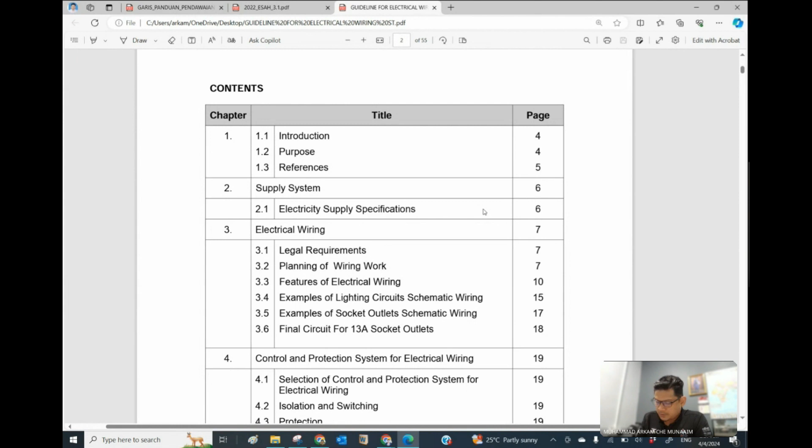The table of contents of this document, we're going to read what it is about, 55 pages, very short, but the narrative needs to be gone through one by one. There's introduction, purpose, references, and from here we will see the documentation used to develop this guideline.

As I mentioned, our work as electrical engineers, and actually all engineers, depends a lot on compliance with standards, guidelines, handbooks, codes of practice, and so on. Based on that, the reference is also very important and will be discussed in this document.

We have also to introduce our supply system, even though we talked about it last week on electrical supply specification, because we need to specify our supply characteristics to suit our equipment needs, talking about voltage level, frequency, and those things.

Then we'll talk about electrical wiring compliance to the legal requirement. Why is it very important? We need to plan our wiring work and the features of electrical wiring, what features we have in electrical wiring.

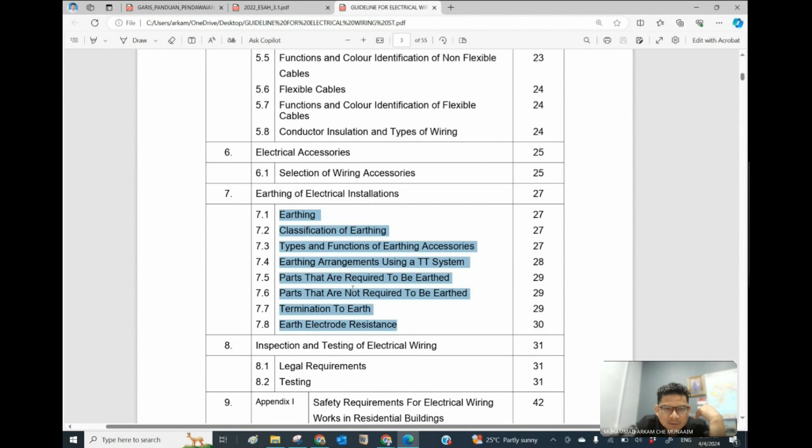Is there lightning protection here? Oh, there is no lightning protection in this document, but it's okay. Let's go back to the document to talk about lightning protection first, then we can come back to this document since there is no lightning protection here.

Earthing only, and inspection. This is very important to explain what kind of inspection we have in our system, and some of it relates to body safety and forms, the related forms. So the lacking part here is actually the lightning protection, but we know why, because this is residential buildings.

For residential buildings, lightning protection is minimal. So let's have a look into lightning protection first from the last lecture, then come back to continue this guideline. This is different, because we ended at part 10 of the document.

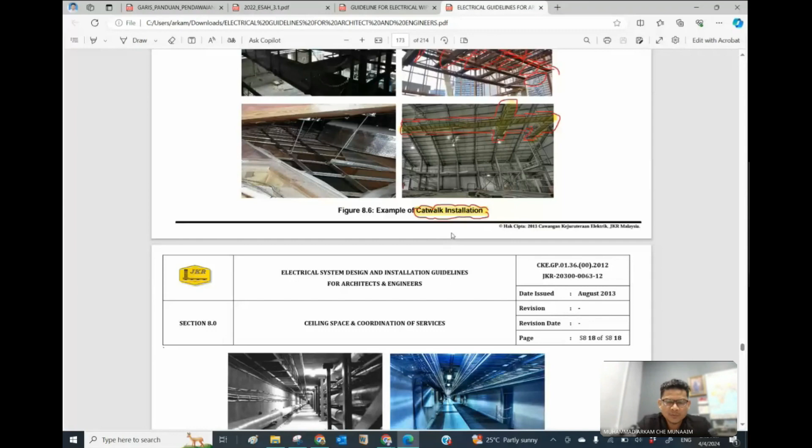We want to talk about cable trenches, which we've covered, and now we're going to talk about lightning protection systems for structures as an addition from our past lecture. This is also important, because in this document we don't have lightning protection since it's residential only. Lightning protection for non-residential buildings is more appropriate to discuss.

All right, okay, as an introduction, let us deselect this, because this is also quite important.

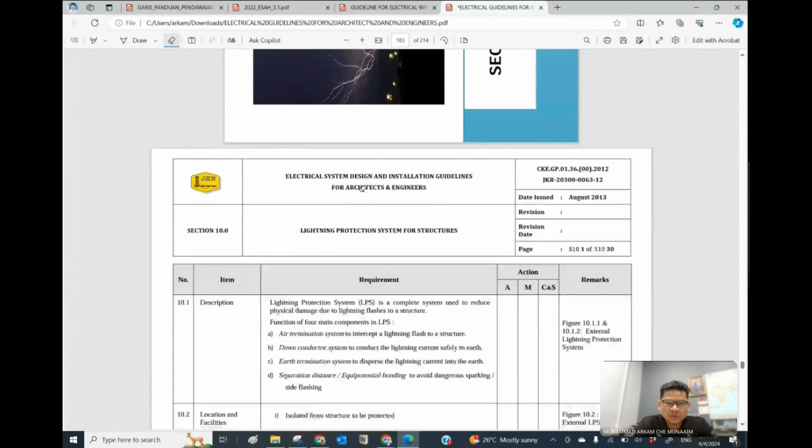In our lightning protection system, we have three main parts. The first part is the air terminal. Secondly, the down conductor. The third one is the earth termination system. So these are the three main parts in lightning protection. I'll try to draw it later, but initially, let's try to find some way.

Okay, this one is okay. Just enough for us to understand.

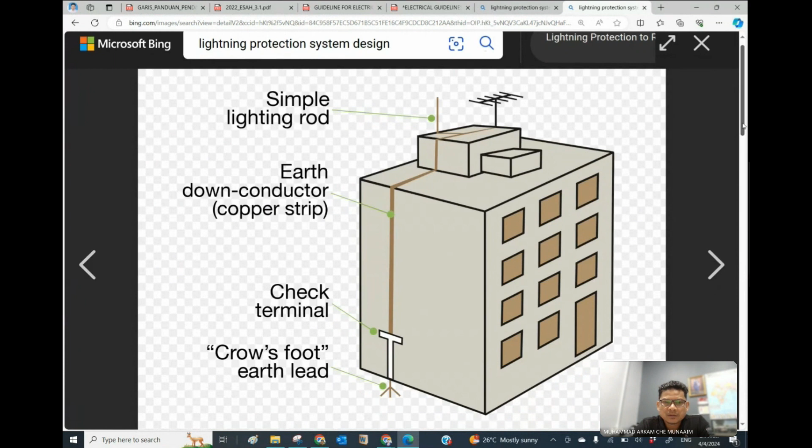Lightning protection comprises of three main parts. The first one, let me draw this. Lightning rod, or air termination. This is the first part.

The second part, as mentioned in the document, is the down conductor, indicated here.

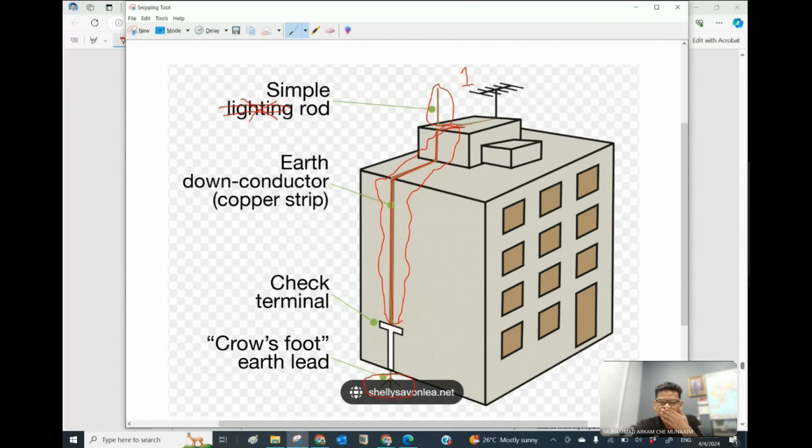This document shows the earth termination system indicated here, where in the drawing they will show like this. This is from the down conductor, this is the lightning rod. One, second, and also third. So this is second, this one is the third one.

So these are the three main parts we're talking about in lightning protection. We've got three main components or three main parts. Very important to understand this first.

But in order to connect this between the down pipe, down conductor, and earth terminal, the earth terminal... this is down conductor, let's use a pen. Lightning, this one is down conductor. This one is earth terminal.

So lightning rod or air terminal can also be used. So these three components: air terminal, down conductor, earth terminal. These three main parts as mentioned in this document.

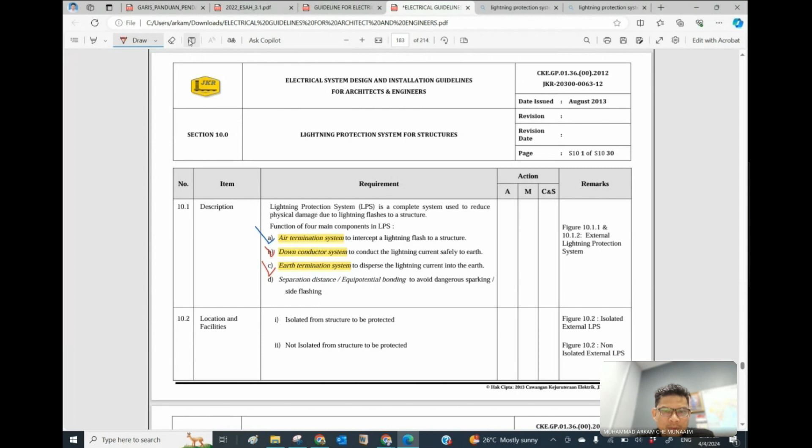One more thing is also mentioned, but we seldom take it as our component, which is separation distance or equipotential bonding. We don't talk about it as a component. It's actually the method, not a component. It's a method of bonding or separation distance.

Okay, so they got a figure over here, but it doesn't matter, we will go to it later. Now, isolated from structure to be protected, location and facilities not isolated from structure to be protected.

Make sure we spell it correctly, because it's lightning, not lighting. So in the document, this one, the spelling is wrong, 'lighting rod' - it's not lighting, it's lightning, but it's okay. It's just a Google search to find the image only, but the spelling is wrong.

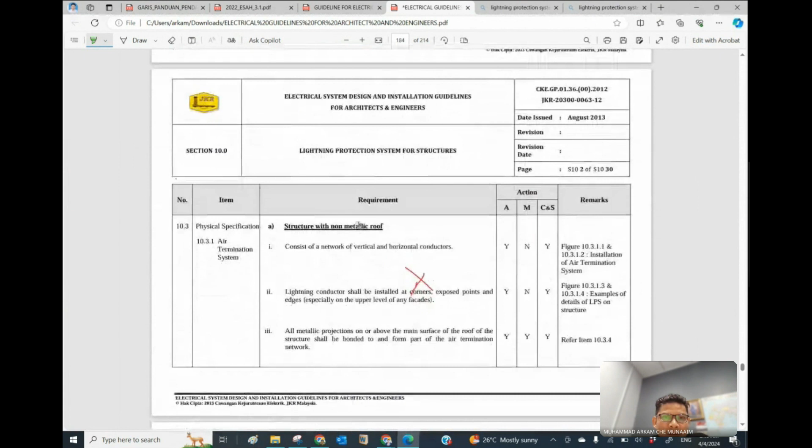Okay, location of facilities, and the third one - what do they say? The purpose of lightning protection is to reduce physical damage due to lightning flashes to a structure. But I will say that actually it's only three, not four - don't add one more, it will confuse the practitioner, because separation distance is not a component, it's actually the method of installation.

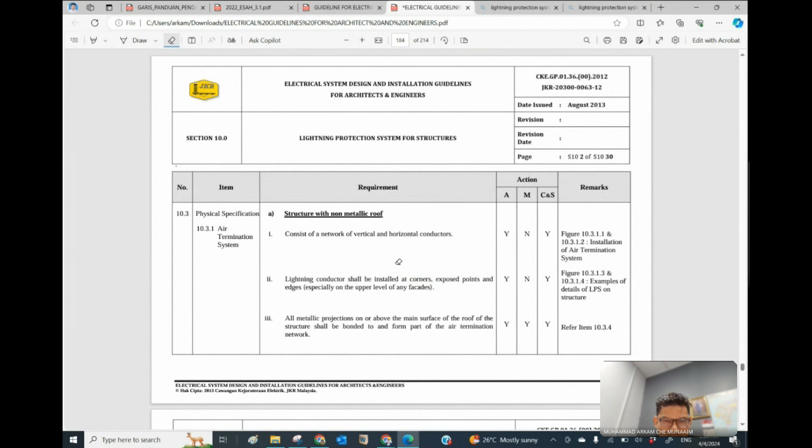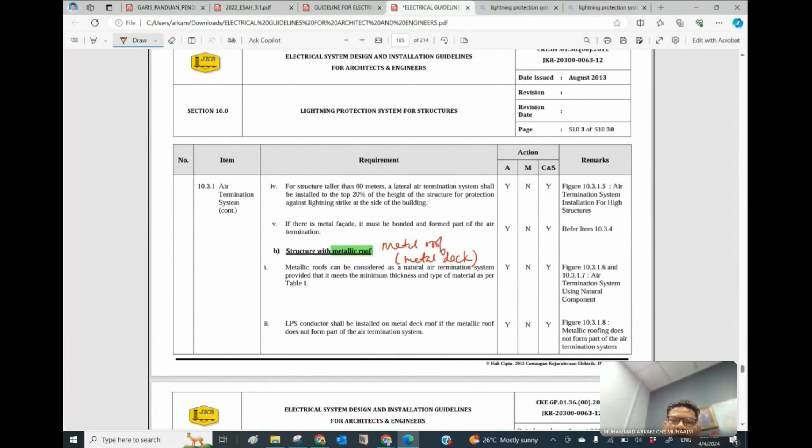Okay, now structure with non-metallic roof. What do we talk about here? There's non-metallic and also metallic roof - there is a difference between them. What does this mean? A metallic roof meaning simply a metal roof, metal deck. So there's a different method of installation.

Non-metallic, for example, what is a non-metallic roof? Flat roof, concrete - concrete flat roof. We also have our genting, tile, including concrete roof tiles. So metallic is a metal decking roof.

So how do we find this metal decking roof? Simple - we have a lot in our PPCAS, FKTA. This is metal decking roof. We have a lot in our big FKTA office. Metal deck and non-metallic roof.

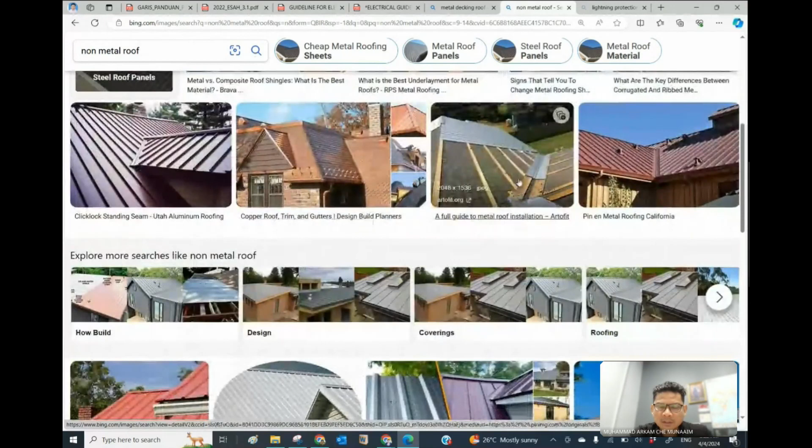Other than that, this is metal roof, this is non-metal - this is what we call clay finish. This is also clay finish. This one is metal, this is also metal, this is also all metal. So we have two different approaches to install our lightning protection, depending on the type of roofing.

So meaning this roofing is considered as a concrete flat roof. While having this concrete flat roof, the installation is different. If we have a metallic roof, the installation is different. That is the meaning by this statement. I don't want to read everything, but there is the statement of non-metal and also metal roof.

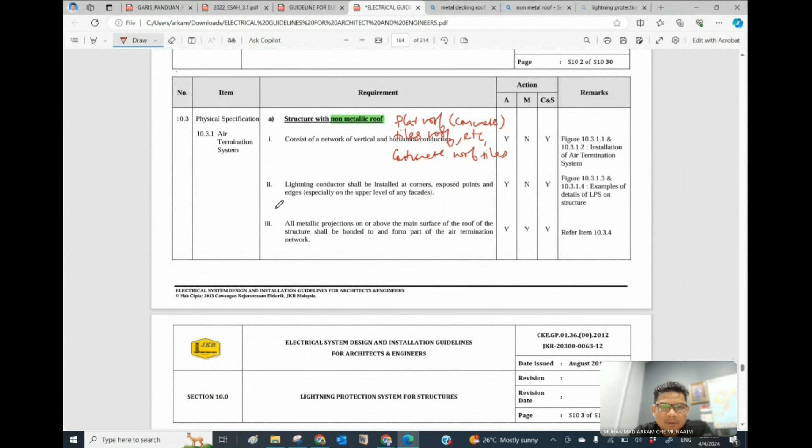Okay, this is how it goes, but we're going to go for the drawing, it's more clear for us to refer to. For structure taller than 60 meters, a lateral air termination system shall be installed at the top 20% of the height of the structure for protection against lightning strike at the side of the building.

So what does it mean? A structure taller than 60 meters, this kind of building, for example, and it is more than 60 meters.

So 20% of it needs to be covered by lateral. And we got one more terminal. This is also lateral.

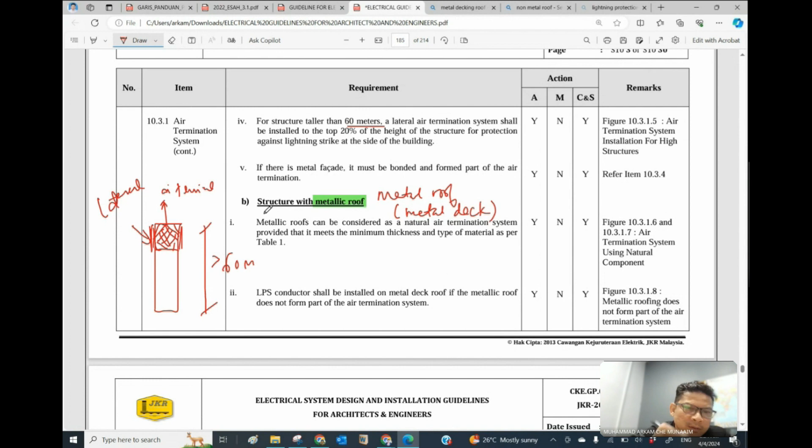This is what I mean by this statement. If there is metal facade, it must be bonded and form part of the air termination. So this is air terminal, and part of it will need to be bonded together, just like you need an enclosure of the patented system.

I've seen one of the recent buildings using that method. TRX is using that method. Is it TRX?

Yeah, this one, new building in KL just completed last year. If you're from KL you will see this building, somewhere in Sungai Besi there. Not this one, this one is under construction. For the top one, they'll change the facade into this look.

Is there any more features that we can see, here it's more clear. This is a new building in KL, beside one more new building, becoming another attraction of buildings, skyscrapers in KL.

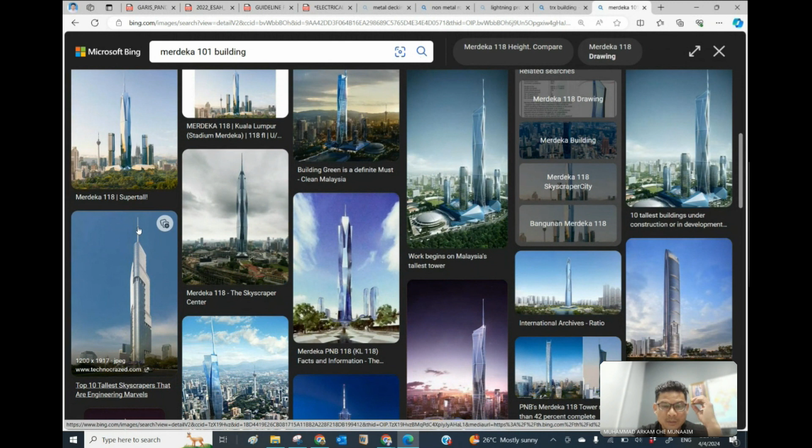Oh okay, no no no, that's here, this one, this building, and we got one more. This building, also in Kuala Lumpur, very nice new buildings. You can see this is not, of course, the lightning protection, but part of it is actually for lightning protection purposes. This one, and this is actually meant for the telecommunication.

This building is in Kuala Lumpur also. So we got two new completed buildings in KL. This is one of it. Sorry, not this one. This one, Merdeka Tower, Merdeka Tower building. My connection is not good, let's try to find it on Google. Just through Google, yeah, much better.

So we got this aerial or antenna of the building, this one. It's now become, I think, the highest building in the world or in Malaysia, I'm not sure. But due to this, the telecommunication antenna over here is very iconic.

And we got one more, TRX, also just completed last year. This one, as mentioned just now, close to Sungai Besi there. And the Merdeka Tower is actually close to our Merdeka Stadium, the old Merdeka Stadium. So this is part of what has been constructed, and we can see the concept is there.

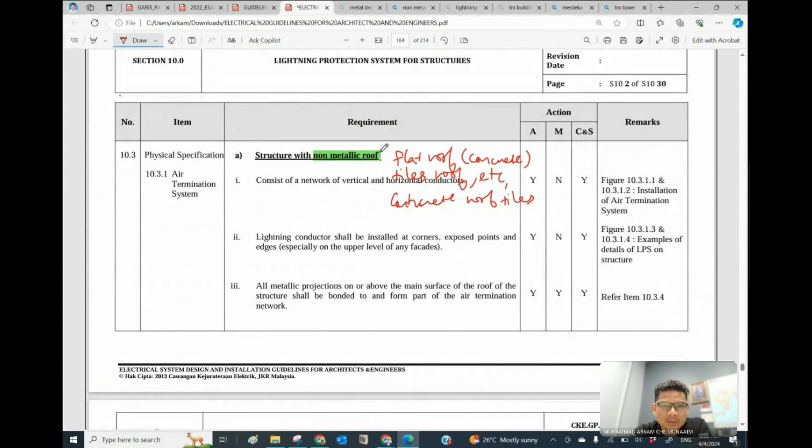LPS conductor, what is LPS? Lightning protection system shall be installed on metal deck roof. Okay, now talking about metallic roof. So for non-metal roof, we will go through the drawing or picture later. And also for this one, it's metallic roof. So how to install? On metal deck roof, which is a metallic roof.

It does not form a part of the air termination system. It shall be installed on metal deck roof. If the metal roof does not form the air termination system, we'll see later. Down conductor - okay, now we talk about air termination.

This is talking about down conductor. A down conductor should be installed at each exposed corner of the structure. This is what I can say is the spec, but it's not necessarily so, because it depends on the design. Down conductors should be installed straight and vertical such that they provide the shortest and most direct path to Earth.

Okay, how to understand the down conductor? Let's see some pictures. Down conductor. Okay, this is all the down conductors. This one still coming, down conductor. Oh, this is a Faraday cage.

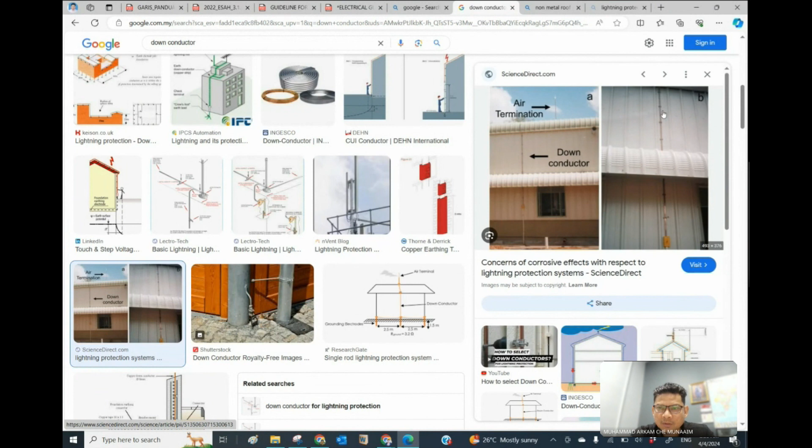Such as this one - this is a down conductor, and this is the air terminal. See, this is a metal wall, but they still install the down conductor there. To me it's not supposed to be this way, but it's okay, should be no problem since they got it in the design.

And where else? See this one also, the down conductor. They're using this copper tape to lay the down conductor.

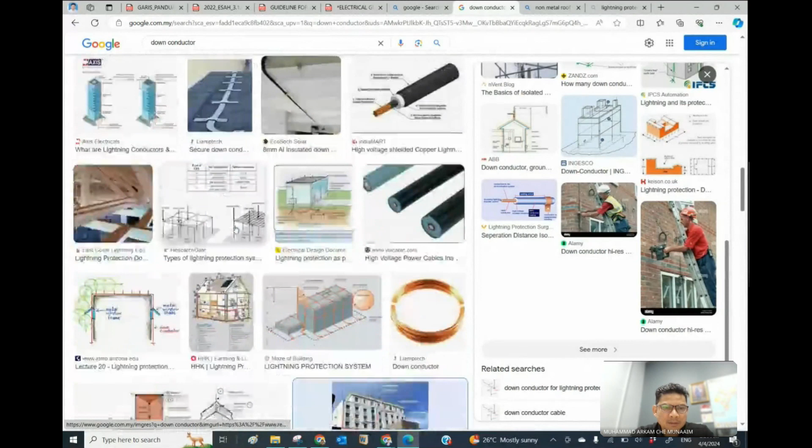What else? To lay the down conductor. Okay, that is actually mentioned by the drawing here. So the down conductor, the air termination or down conductor, that will be the second part.

The down conductor should not be installed in the gutters or down spouts, even if they are covered with insulation. Don't install down conductor in the gutters or down spouts. What is down spout? Rainwater down pipe. Don't install it there, even if it's covered by insulating material.

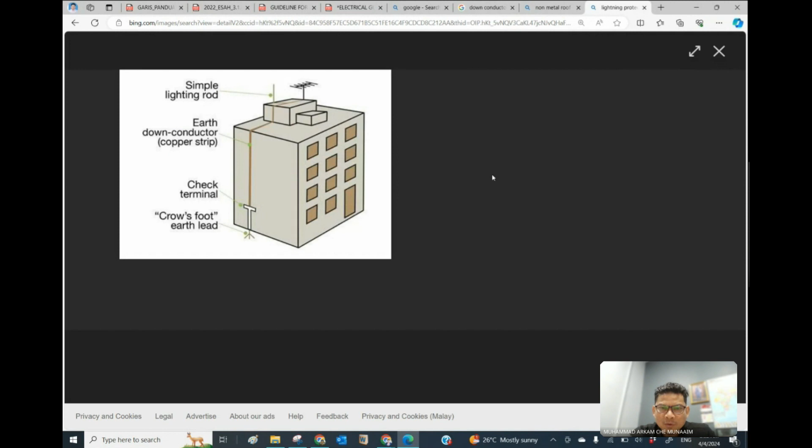Method, how to install? We've got 2 or 3 methods now. I mentioned about 3 methods. The first method, exposed. Expose it, fix to the wall. You can pin it and test point later. Test point we will talk about later. So, for example, this one, exposed.

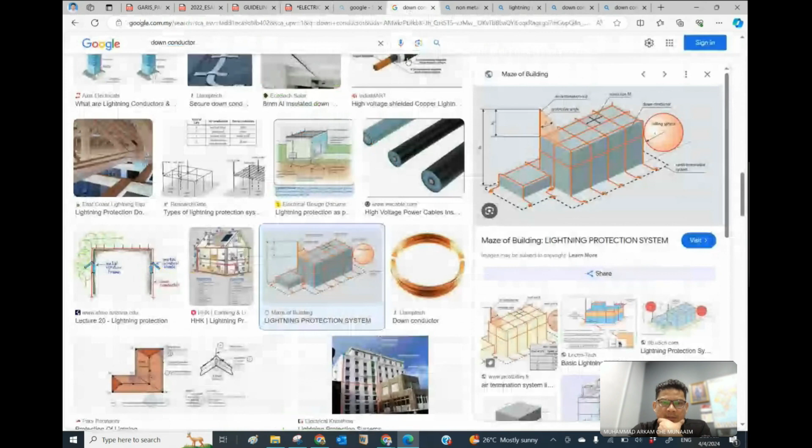Exposed down conductor. We can see also in the last picture. The installation, see, exposed down conductor. And we can also put it into paint if you want to paint it, or you can also cast it in concrete, meaning to say that you put it in a wall to avoid vandalism, because these things, sorry, this thing is quite expensive.

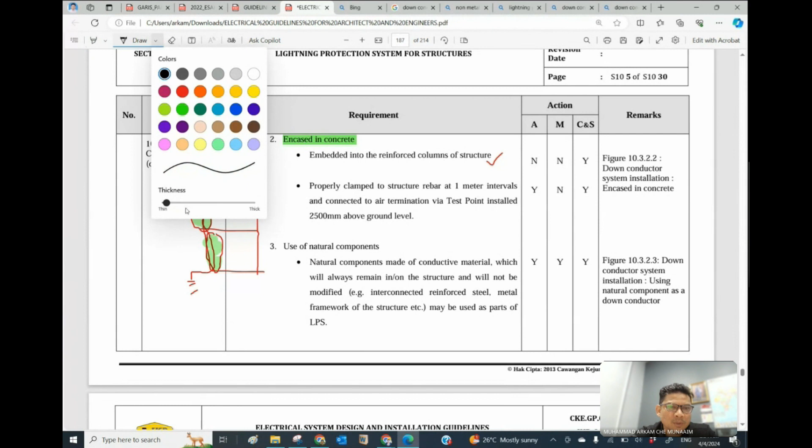If you've got a two-story building, for example, this is the air terminal, this is a down conductor. We can put it exposed. At one point, they will go into the wall and come back out. So this part will be exposed, this part will be encased. So this is also being practiced, because why? It's very difficult to reach the top if you want to vandalize or steal the copper tape. It's very difficult. So that is why this might be exposed, but this one they will encase in the concrete, so that at the lower level they don't worry about the vandalism or attempt to steal the thing. Okay, properly clamp to the structure rebar at 1 meter intervals.

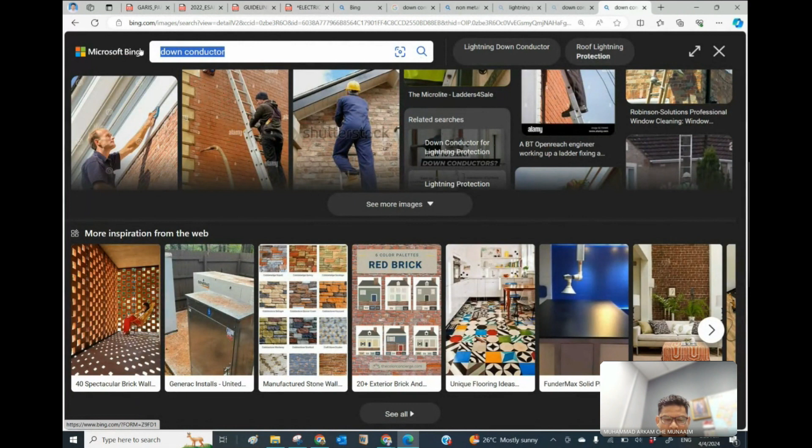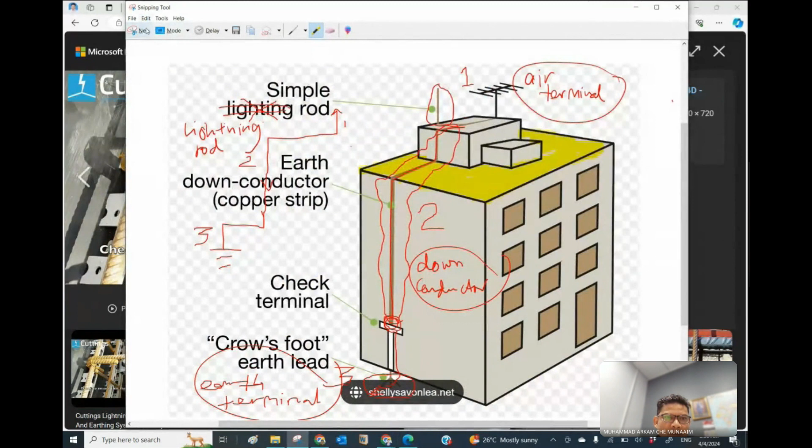We can do something like this. Yes, something like this, let's see. Okay, good, this one is good enough. Even though the spec is not there, but it's okay, just to show you how it's been done.

First of all, you can see this red pen, this is the earthing. You can see it's different from the bar, this is the rebar. This one is actually the lightning protection, lightning cable lah, boleh lah. So this one is the rebar. So they bond it into this clamp. That clamp will be erected together with the bar. So you can see the bar over here, and they clamp it together with this lightning cable.

So you can see this is how they do it. This is another clamp, this is clamp. This is what we call the lightning cable. This is a rebar for structure, this is another rebar, and that is how they've been installed. So we name it as structured bonding.

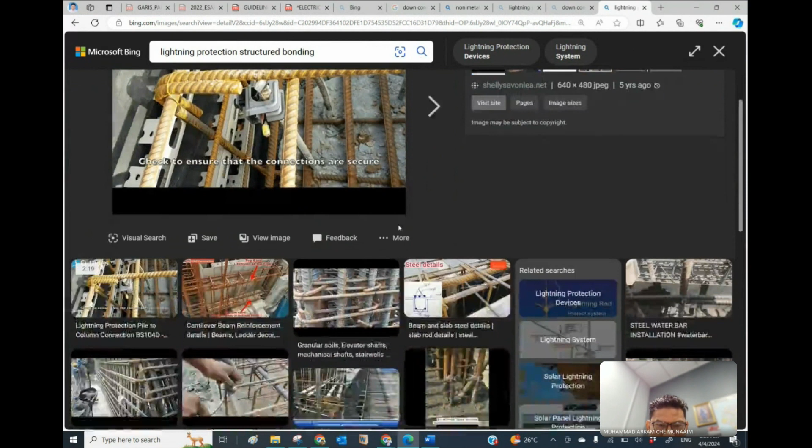Is there any more pictures for that lightning protection?

This is normal rebar. We cannot see any other work method of doing this. So basically, that is how we erect lightning protection for the cage. That's for another structure.

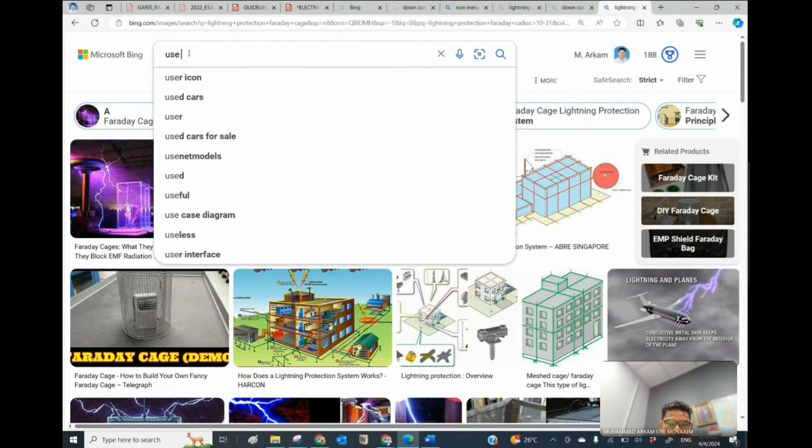There's a paper. Even myself, I also have a paper talking about this - the use of rebar for lightning protection.

So they use rebar, and at the same time clamp it with our electrical conductor for lightning protection. So for this one, yes, this is another picture that we can use as our reference.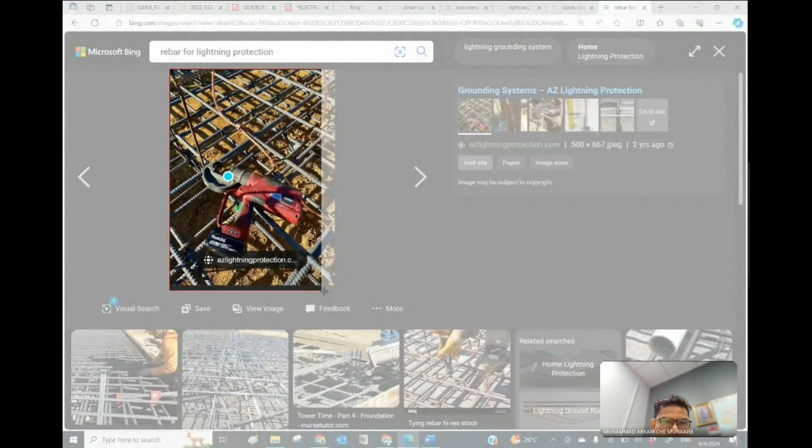Can see things similar, but not - sorry, this one is the electrical lightning protection. This one is actually the rebar, and it's clamped over here. So there is another one, put it here as your reference.

And can we have more, just to show you more? No, I cannot see. For this one, no.

But it's very common and popular in Malaysia, just to avoid cases of vandalism. So there is the encased-in-concrete method: use embedded reinforced concrete column or structure. Properly clamp structure rebar at 1 meter intervals. This is also the standard for them.

And connected to air termination via test point installed. This is a test point - test point, I will touch on it later.

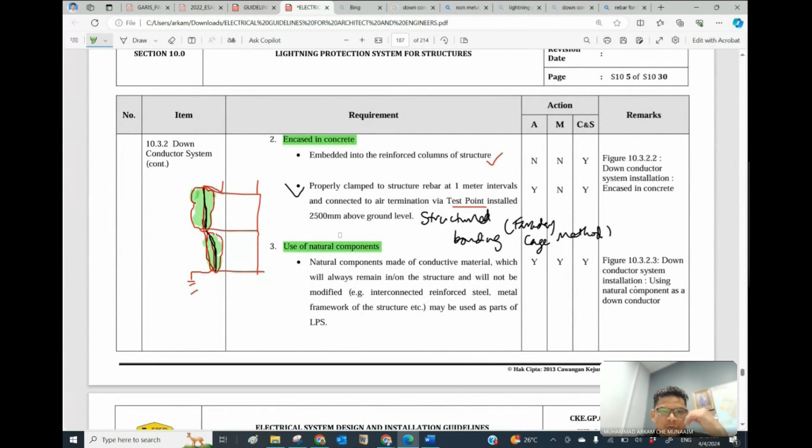Now the third one, we can also use natural components. So we have three methods of installing lightning protection: the first, we put it exposed; secondly, encased in concrete; the third is use of natural components. What are the natural components? Whatever conductive materials can be used.

They must always remain - the structure will not be modified. Make sure the structure is not modified. Metal framework is very useful for this, and may be used as part of the LPS.

So for example, for a metal building like this - if all of these are metallic materials, including the roof, then basically we don't have to use any lightning protection system here. If all these are metallic materials, we don't have to put our lightning protection over here. No need, no need, because the building itself is actually metallic or structured metal, so we don't have to put any more.

And the same goes for this type of building - if everything is metallic material, we just use it as it is.

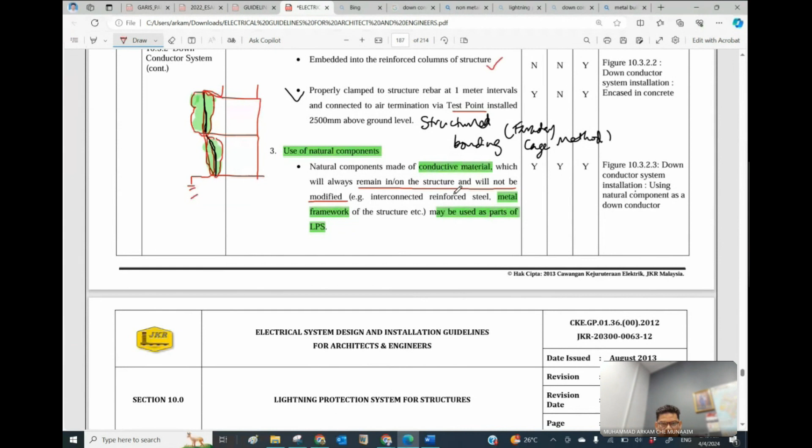So if we've got a complete metal structure, we don't have to use anything other than these two above - meaning the method of down conductor for exposed also not required, and for the encased one also not required, since it's now a natural component.

Basically this uses a building component - the term 'building component' is more accurate than 'natural component'. With natural components, sometimes they use wood materials, which is not suitable for lightning protection.

Now, steelwork within a reinforced concrete structure is considered electrically continuous provided that the major parts of the structure, both vertical and horizontal, are welded, and so on.

So this is the condition to use our building material, basically the building envelope, as an LPS system - LPS, Lightning Protection System.

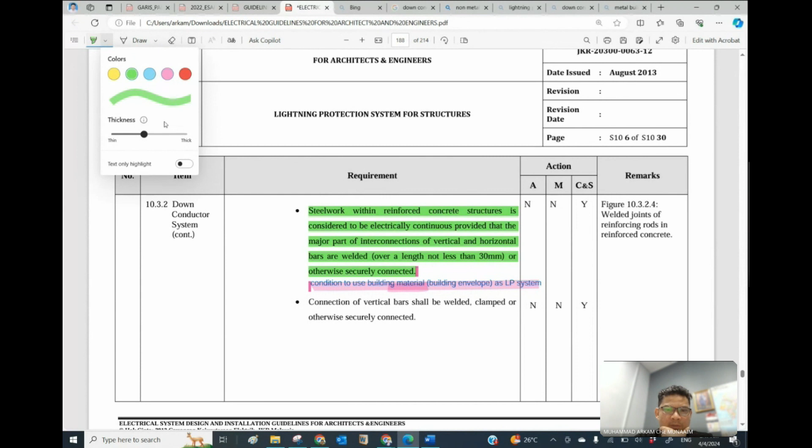So in order for us to use the building material as the condition to use building material as lightning protection system, one more condition is the vertical bar must be welded, clamped, or otherwise securely connected. It must use welded or clamped materials, or be continuous - don't have any joints if possible, but they must be joined properly.

Okay, so down conductor - we have talked about the air terminal, we've talked about the down conductor, and now we go to the last part, which is the earth termination system - the third part of the lightning protection system.

Where was our - better we use this. No, no, no, this is not the best one. I think this one is the best one. Yeah, I'm going to use this one.

So for example, this one is the air terminal, this one is the down conductor. Now we want to talk about the earth terminal - put it here on top. The earth terminal, here - earth termination system.

The down conductor should be connected to the earth termination system, which consists of earthing conductor and earth electrode. So in the earth termination system, we have these two main things: earthing conductor and earth electrode.

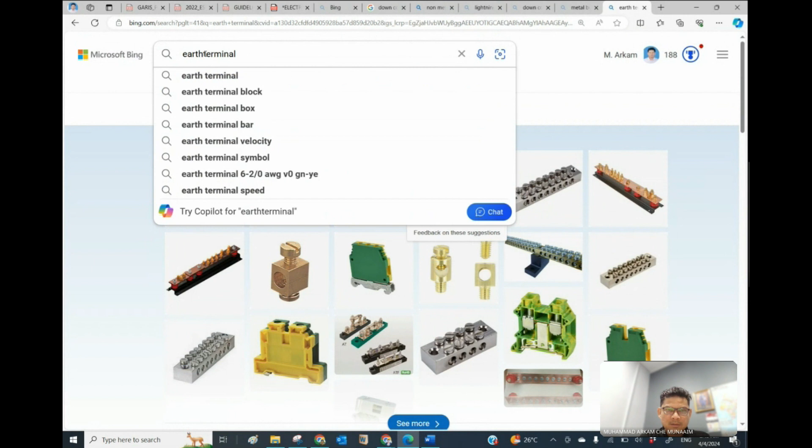Let's see from the internet. Okay, this is not right. Earthing, earthing, earthing. Earth chamber - this is more accurate. You always see this in our construction, so this is the earth pit or earth chamber.

So the thing will be here inside. This is how it's been prepared and cleared. Inside you can see an image like this. If you open it up, basically it's a connection between the down conductor and also the earth terminal.

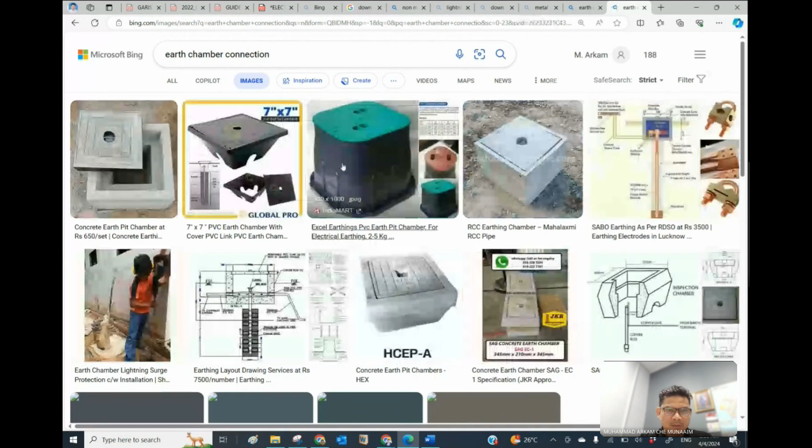Then actually the earth chamber connection - so this is the earth chamber, and this is how it's been here. This is the bare one. So on the top of it, let's see - the top will be the surface that we can see. From here, we can see, but we cannot see what is actually underneath the chamber.

This is basically the rod, the earthing rod, and they will be installed vertically in the ground, connected by using this dowel. We can connect by dowel to connect everything. So it's actually copper bonded together to give our earth connection between that.

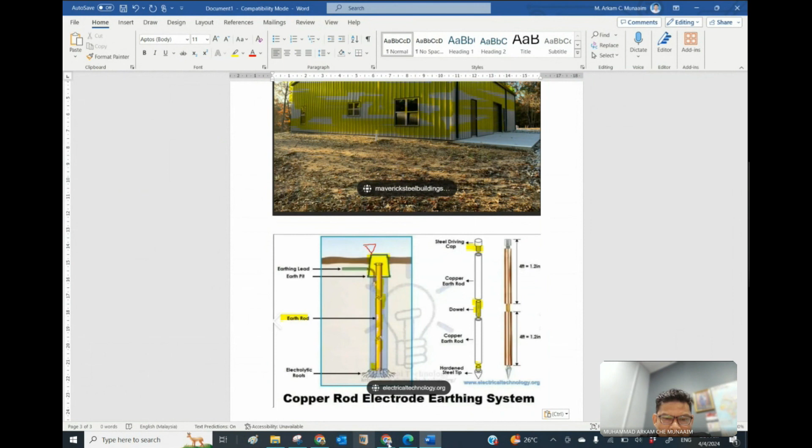Okay, now so this is the earth pit, earth pit conductor. This is how it's been installed. So on the surface ground, we will just see things like this one, shown by the arrow here, or things like this.

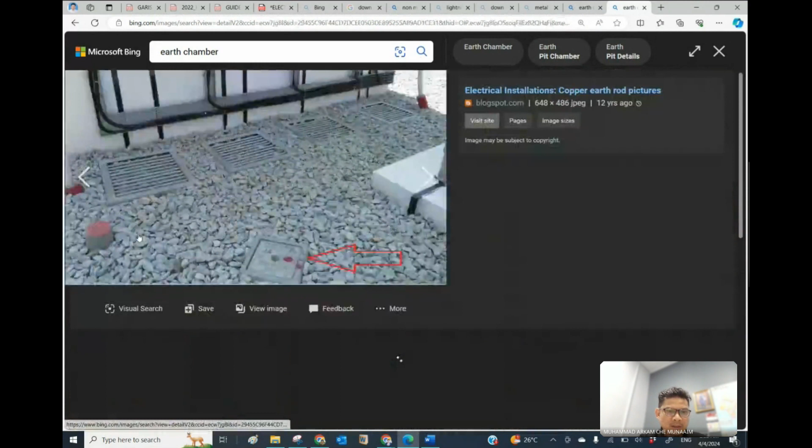This will be mentioned about the earth pit, for example. So this is how it's been covered - this concrete cover will be put, and it will enclose everything on the surface ground, so we cannot see much inside there. Basically, this is how it's been installed.

This is how it's been installed. So the earth copper here, this is actually the concrete earth pit. So this is the detailing part of how they're going to install this thing.

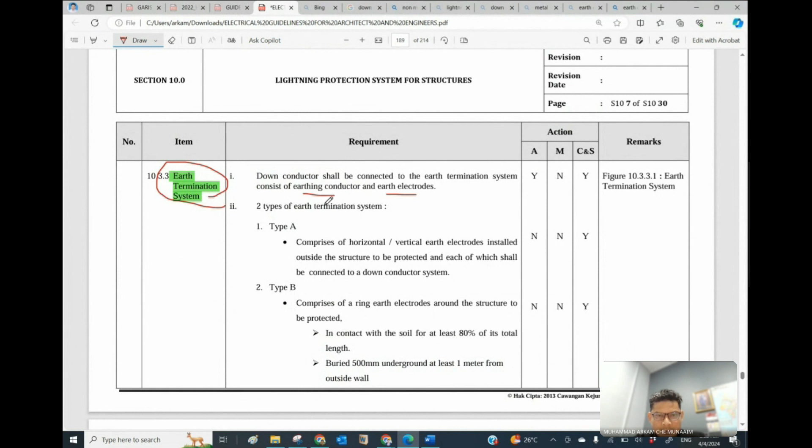Okay, let's move into our materials. Continue - two types of earth termination. This one I don't want to touch, it'll only make you confused, don't have to. We just talk about the down conductor to be installed. The earth termination system consists of earthing conductor and earth electrode. Done, that is the thing.

So the drawing will show you something like this. This is the surface. This is the down conductor. This is the earth terminal. Okay, so done.

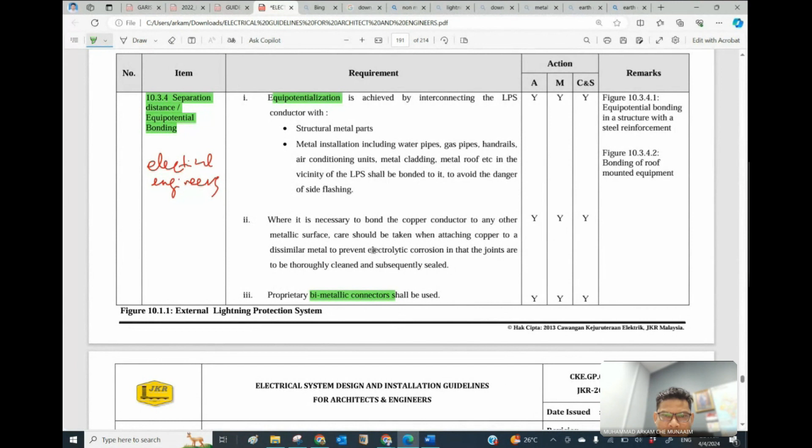Next, this is the fourth part, separation distance or equipotential. This is mainly for electrical engineers, so you don't have to know much about this - let the electrical engineers handle this part. One more thing related to this is bimetal connectors, equipotentialization, electrolytic corrosion. This we pass to them, let them decide, you don't have to worry about it.

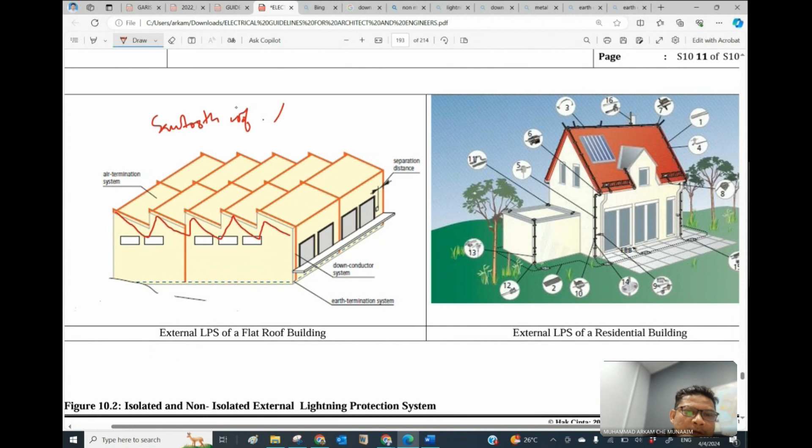But you can see the drawing also isn't really related to our kind of installation - this kind of sawtooth roof. This is actually the name, sawtooth roof. Sawtooth roof is very uncommon in Malaysia, but I think that is not the important part.

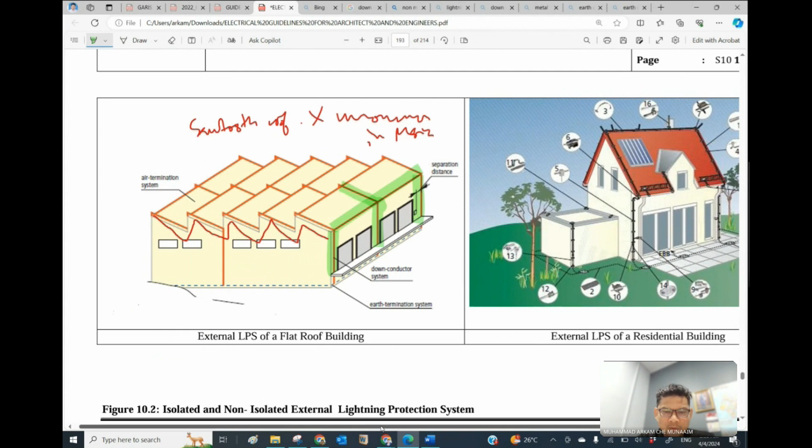The important part is to show you this - so the sawtooth roof is uncommon in Malaysia, I think this image is from Google too. This is the lightning protection system when we talk about residential - we have this air terminal, down conductor, and also the earth chamber. So these three parts are talking about the lightning protection system. So when being asked what is the component of lightning protection system, always remember just three things - lightning protection system components: one, air termination.

Secondly is the down conductor. And the third part is actually the earth chamber, earth terminal or earth chamber. So these are the three main components of lightning protection system.

Non-isolated external - this just wants to show how they install non-isolated external lightning protection. So this is the lightning protection installed at the house.

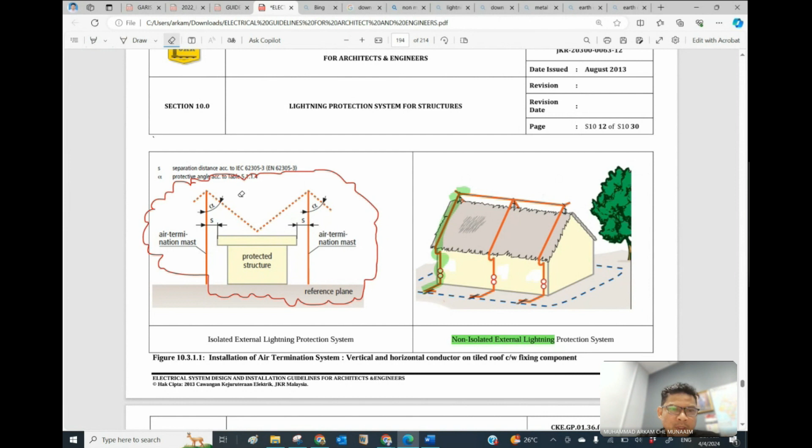One more thing that we need to understand, not to master, is how they calculate the number of terminals that is required. So they're using the protective angle method.

So this is the protective angle, this is the angle. Let me try if I can see... I can, 10 years ago lah. I'm not sure if I still have the document or not. What is this? No, very less now. More than 10 years ago. So the idea is to use the calculation to calculate

how many terminals do we need in order to protect our installation. So basically, they just use the protective angle method. Protective angle method means to say that one terminal can protect a certain protection angle. So this is the area where we get the protection by calculation.

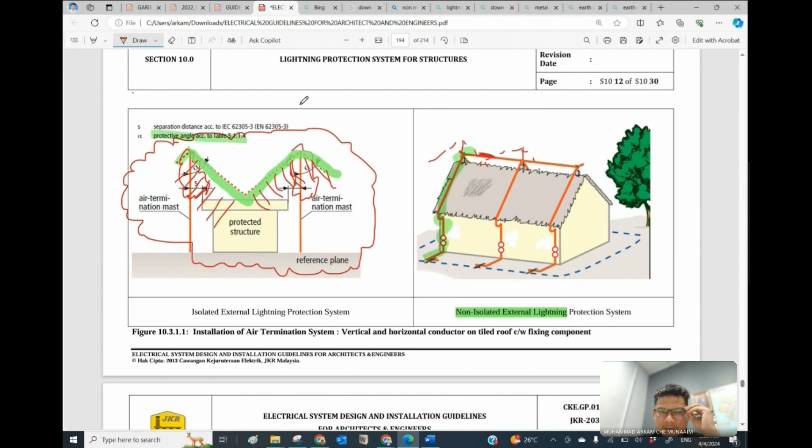So we need to find, for example, this one and this one - this is the protective angle. So protected by this, this also becomes one more component to be protected. So things like that, but it's an electrical related calculation design.

Okay, here. This is things related to the installation of copper tape on non-metallic surface or non-metallic roof. Non-metallic roof, this is like roof tiles.

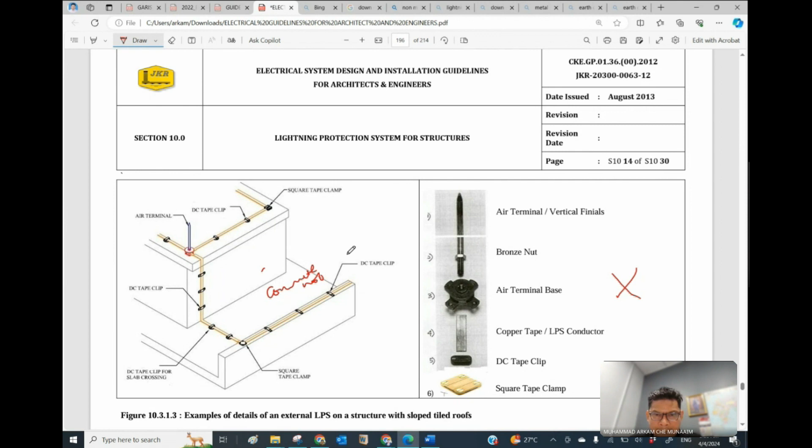Things like this. This is also for concrete roof. So this is basically the components: air terminal, nut, air terminal base, copper tape, DC tape, square tape clamp

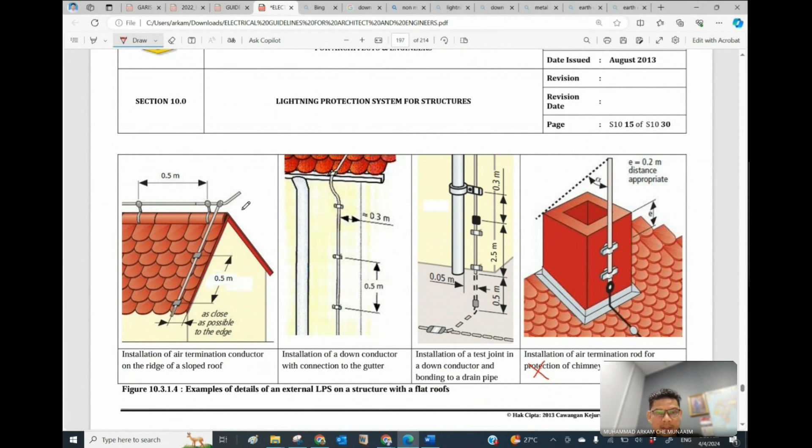to clamp this thing together. So you have this as material to be installed. This is how it's been installed. It's actually very simple, the design also quite simple, but need to go through this kind of distance and requirement. On roof, how it's been installed - separation distance and also those installed on the wall or on the parapet and so forth.

Higher than 60, as I drew just now. So this part must be metallic, installed on the side, so that we can have a lateral. If the lightning occurs, it can be proposed to strike in this area. Of course, one thing about lightning - we cannot ask lightning to strike wherever we want. We can just prepare the best design in order to assist us when lightning occurs.

Okay, this one - another method of having the design is by using a rolling sphere method. You can use a protective angle, you can use a mesh method, or you can use hybrid. That is why for high buildings, hybrid installation is also used, meaning they don't rely on just one method - they use all three methods to design. This is more to the design: rolling sphere, protective angle, and also mesh method.

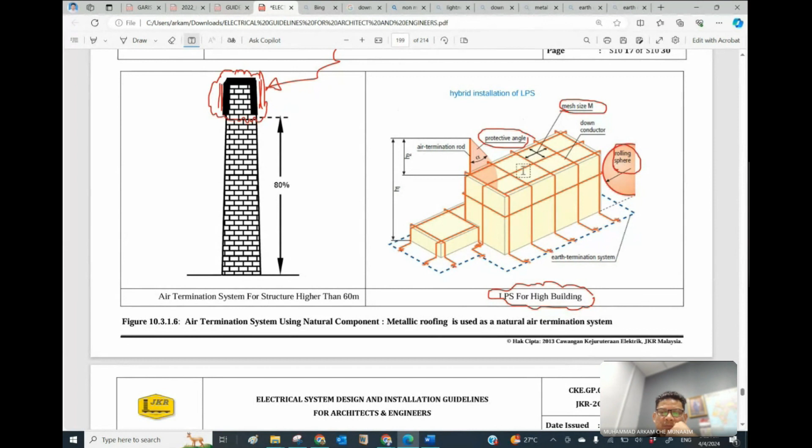Okay, now if our structure is metallic material, such as lead, steel galvanized, or titanium, or copper, or aluminum, or zinc - I mean the roof, metal roof - the thickness is mentioned here, the thickness of the material is mentioned here, to use that building materials or roofing materials as our lightning air terminal.

So this is the lightning LPS. This is a metal roofing. So you can see from here that this installation uses the building materials, in this case roof, as the air terminal - using roof, metal roof as air terminal.

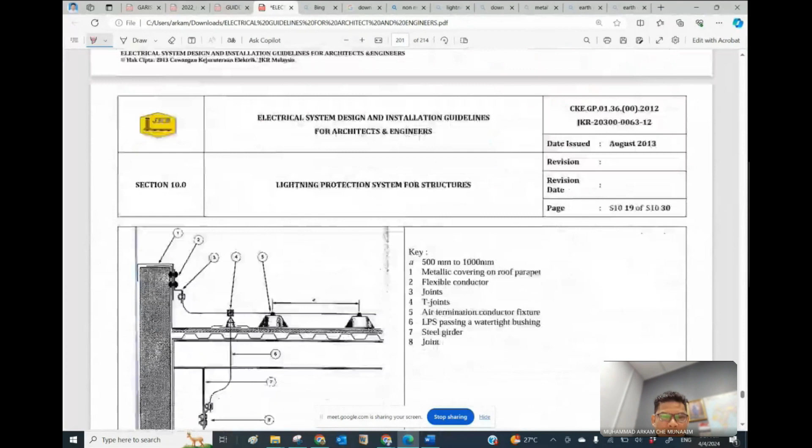Okay, done. All right, next one. This one is how to install. I've shown the pictures more clearly. This is the lightning protection material.

Okay, but things like this, if we have this, what we call it, metal roof, if we have this metal roof, this one is actually not required if we can go for this kind of installation. See, they just clamp on the metal roofing. So basically, this is optional only. It becomes optional.

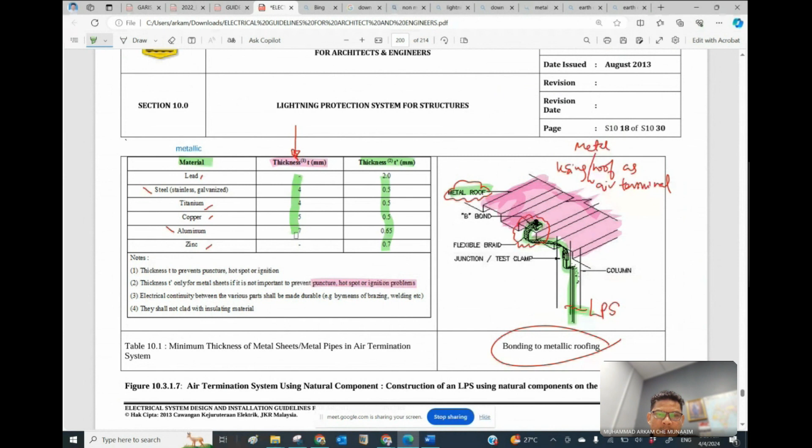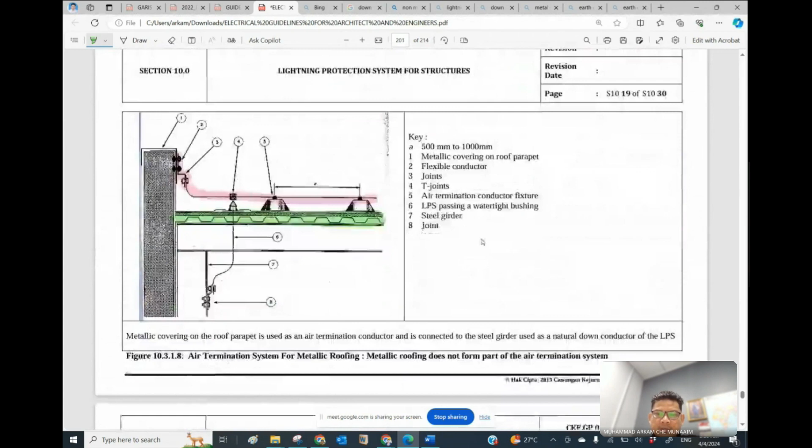Optional to have LPS. Better to go for bonding. Better to go for bonding. So this is the meaning by this picture, but it's good to show you. If I can decide, I better decide this method. Installation, you just clamp on the metal decking by complying with this requirement, and you don't have to lay the copper tape along the roof. If you're constructing, for example, a warehouse 100-meter long, using the metal decking, of course it will be very, very costly to install this lightning protection compared to this method.

Compared to this method, so there are things that you need to clarify as an electrical engineer. Okay, they also show the drawing, but you cannot show quite detail. We have also a test point. I've also mentioned about test point just now. So let's try to talk about test point.

Okay, test point is a location where the copper tape is prepared in a box. Normally we use either bimetal or a straight joint from copper to copper, or aluminum to copper, or GI to copper, things like that also happen because this material is not necessarily copper. Sometimes they use different materials - aluminum can be used, even steel rod can be used, even stainless steel can be used. So in order for them to get equal bonding potential, one thing that they need to go for is this test point, and here the installation of bimetal needs to be there. Bimetal means two metals joined to become one, or actually to change the property of one metal to another. So this is the function of this test point, one thing.

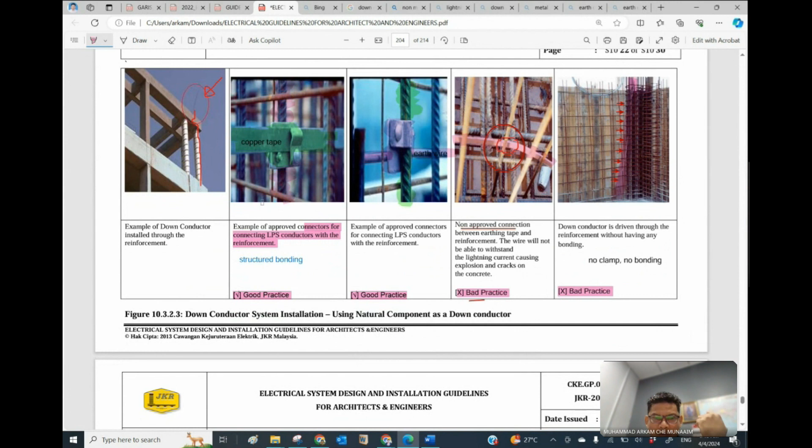Okay, one more thing - the installation of lightning protection can start as early as during the piling steel bar work, span pile cap steel bar. So from here, they can actually install the lightning protection somewhere here.

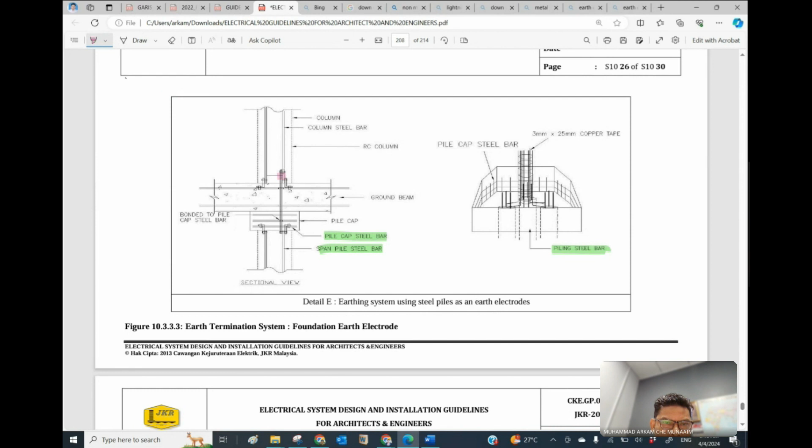Clamp it into the span steel bar, somewhere here. So this is the pile cap, later on it becomes the pile cap or footing. And this is the reinforced bar from the span pile, from here.

And the reinforced bar been joined with our RC bar. This is the bar.

And from that bar, our lightning protection can be installed along the way, starting from the footing. Starting from this bulkhead, it's erected up to the top level, so it reaches the point here. So from footing, raise up to the top floor, to the roof beam.

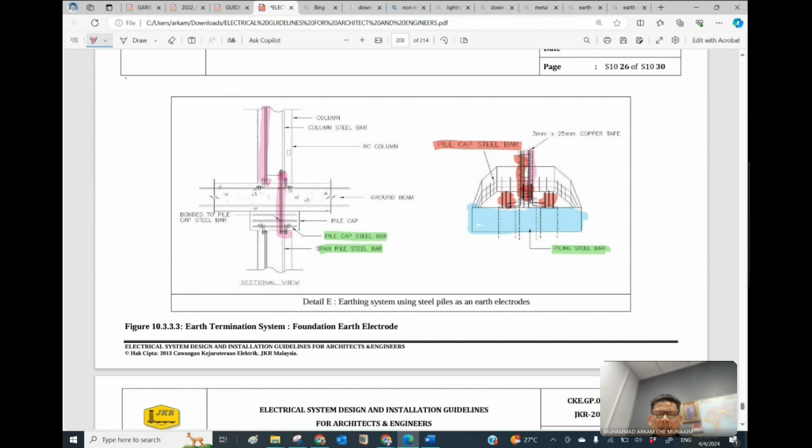I will try to draw later. So this one, starting from the reinforced concrete footing, will climb to the column, to the top of the building, until we reach the roof beam.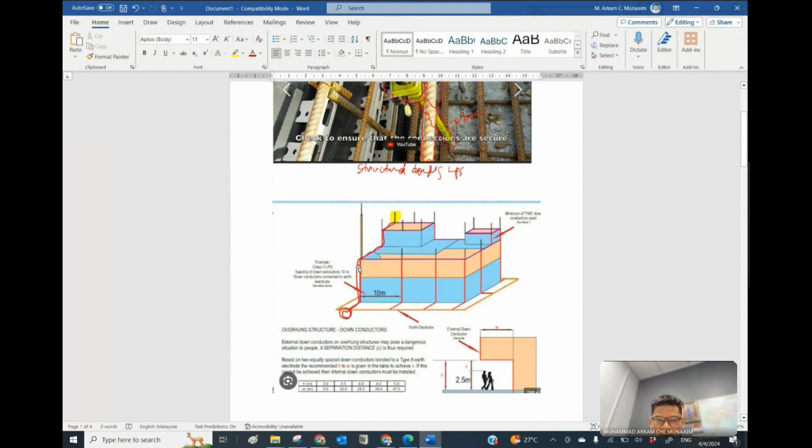Okay, this is how they install it, and they put detail on the column, to climb up as a concrete bonding. This is actually to create something to suit this design, and they're using this drawing to show you.

This drawing shows detail P, detail Q, and so on. This is where the clamp is. They've calculated all this. I'll try to draw it later. So here, how do they do the clamping part? If you can see, really from here, this is a G clamp.

This is the clamp detail, and detail P is actually this, this is detail Q. This is detail P, clamp detail P. This is supposed to be P. This is detail clamp here.

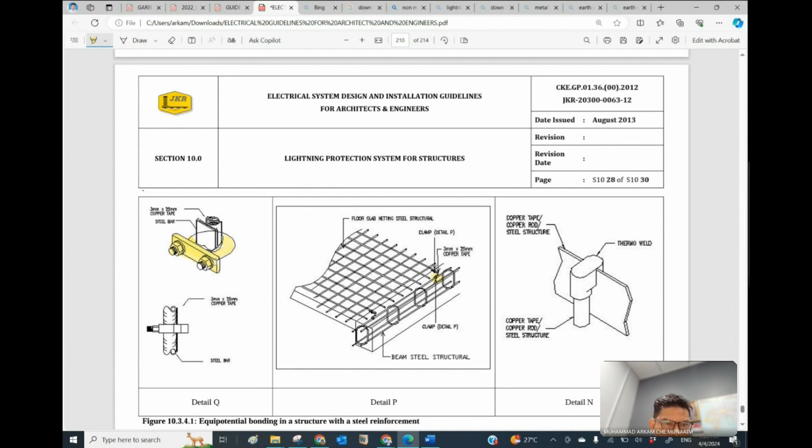So this is the clamp, we name it a G clamp. Okay, let me remove this. So the G clamp is just this one, where you clamp like this onto your bar. This is your rebar, this is the bar.

And this is your copper tape. So you've got three materials over there, just to show you how it's installed. So that clamp joins together the bar and also your lightning protection. This is for clamp, this is for earthing. Detail N for earthing - in this drawing, detail N is actually here.

Okay, we can skip this. Also, we can skip this. Done. Done. Correct.

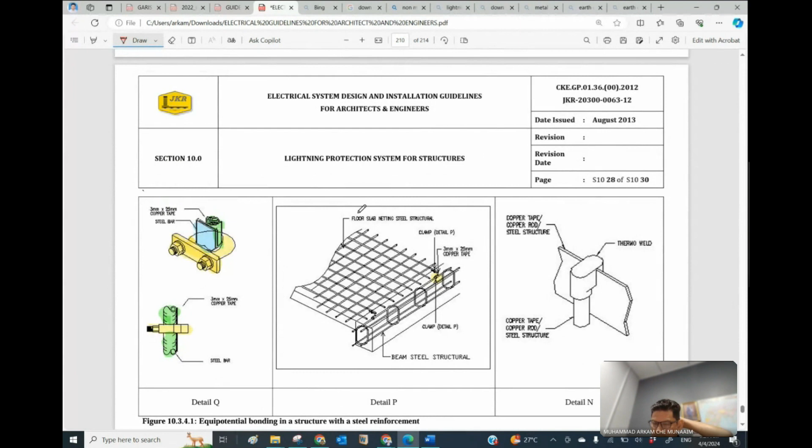Okay, this is what we're about to talk about - lightning protection. We've got about 1.5 hours too. It's not that simple, but I will try to give an example with an area for me to draw for you in the same document.

Okay, we can use this one because we have things installed over here. Now what we're going to do is change the layout orientation to landscape, and move to the third page. I'll try to draw it for you. Margin, we'll put as narrow as possible. Size is A3, the big one. So for us to draw, we'll erase it later, no problem.

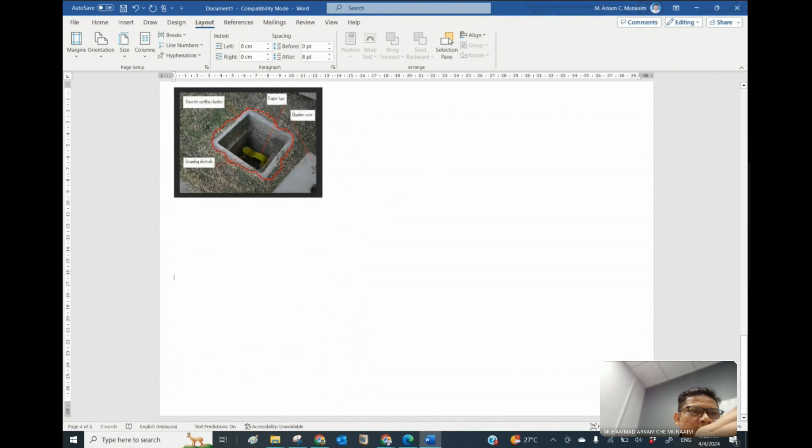Okay, now as a summary, I will try to use my design and drawing to show you. This is basically what we have discussed about. The lightning protection system comprises of three main things - LPS components.

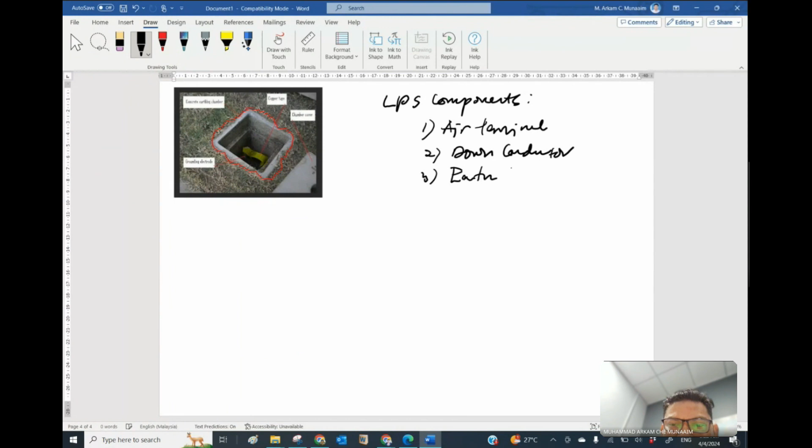Air terminal, down conductor, and also earth terminal. Okay, to understand it's very simple - we have this air terminal, down conductor, and earth. These three important things: air terminal, down conductor, and earth terminal. This is the lightning protection system - these three main important things.

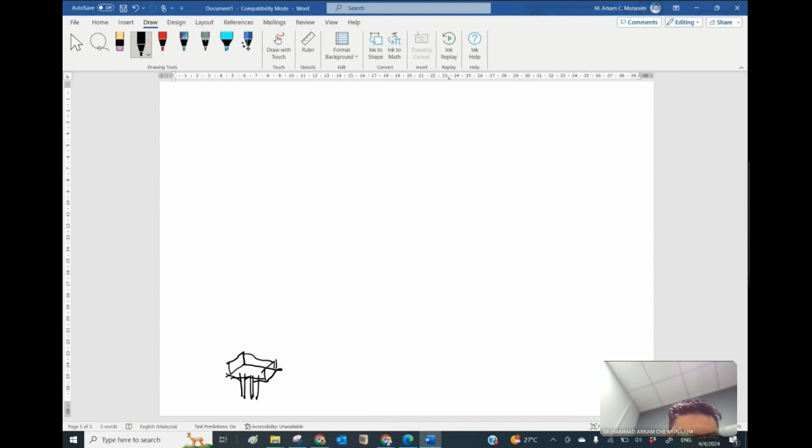But in order for you to understand more, starting from the beginning on how we install it, we can start with this design. Okay, now starting from your footing, piling - what's it called - piling.

And then you have your pile cap. So from here you get the installation from your existing pile, and then from here we started to erect our footing, and it will be linked up to earth. Ground beam, pile cap, stump.

So we have the reinforced bar over here. Now our lightning protection can be started somewhere here, and erect this way, this way, this way.

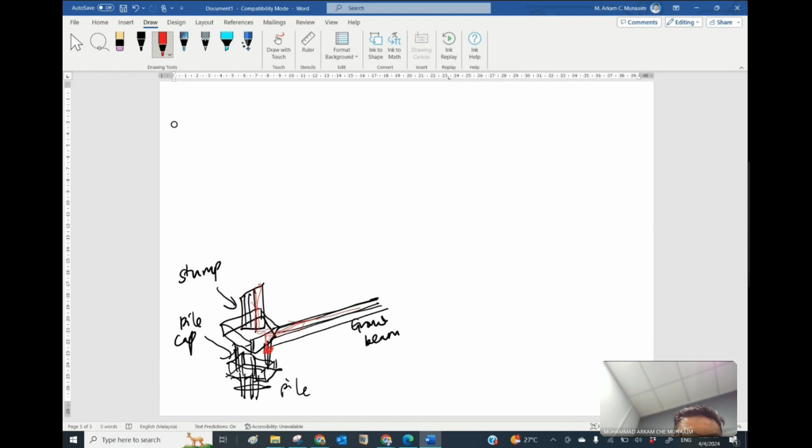We install together by clamp, by clamp. So as the building is installed, let's say you go for first floor beam, first floor beam, and the lightning protection will be raised and installed along the way.

This is your ground beam. You install this way and merge back to your another stump over here. And it's actually installed also from here, this bottom. Actually this one and this one are the same.

So this building will raise as a column and meet to the first floor, and the installation is continuous, raising on the LPS.

Okay, up to your roof beam. So this you multiply by n. How many floors we don't care, up to your roof beam. So our lightning protection will be ready over here.

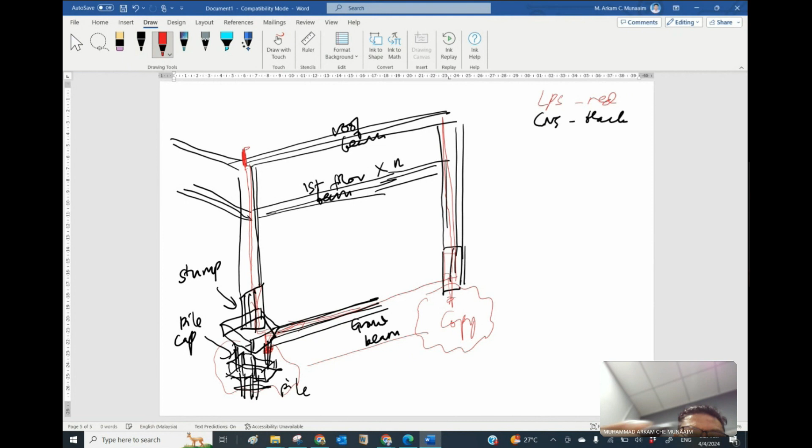Ready for what? If you put, for example, a pitch roof, let's say this is a metal decking pitch roof. So our lightning protection will be here and just clamp it into the metal decking.

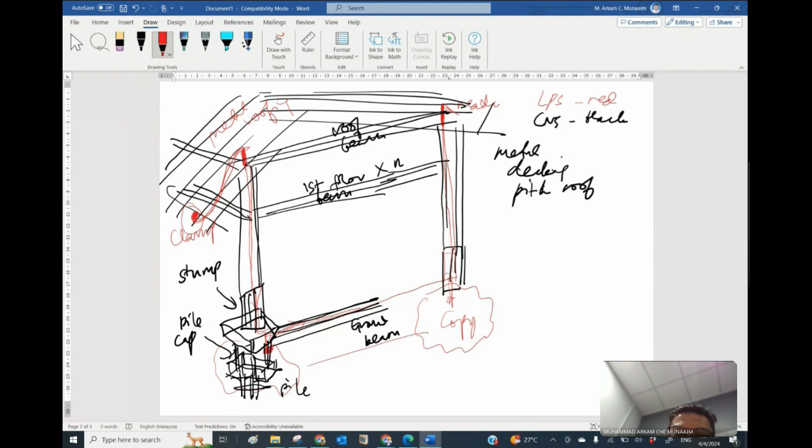This is, let's say, a metal roof pitch. Same about this area, clamp. So basically all of your roof here will become equipotential.

You need to know that this is actually your air terminal already. You don't have to put another air terminal over here. Not required and not needed anymore.

And your structure will become the carrier of your lightning protection system. This is your structure, this is your ground beam, this is your intermediate beam, this is your roof beam. So your structure will become the carrier of the lightning protection wire.

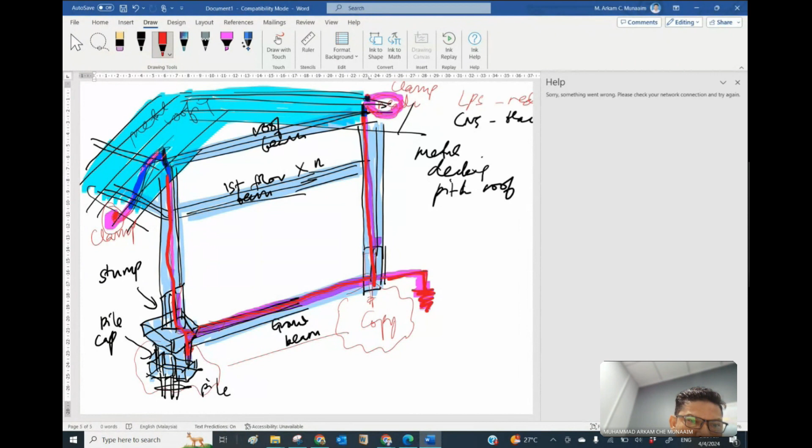Bare conductor, it's copper. This is your earthing. And here is actually your test point.

So in this case, we don't need an air terminal because your roof becomes the air terminal. So this is our concept of the Faraday cage in LPS.

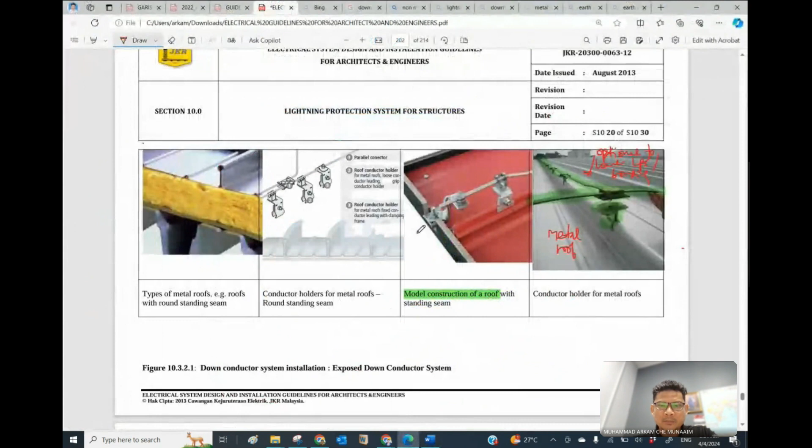So this is how it can be illustrated for you to understand about the lightning protection system, as mentioned in the document that we have discussed and read just now, about 1.5 hours just to explain about this lightning protection system. I think with that note, we should end here. I don't want to go for another document. This is quite heavy for you already.

The thing is to understand that lightning protection is part of a very important area in our installation, and also will be very useful for you to understand how, as a non-electrical engineer, to work with our electrical engineer members in order to deliver the lightning protection for our construction method.